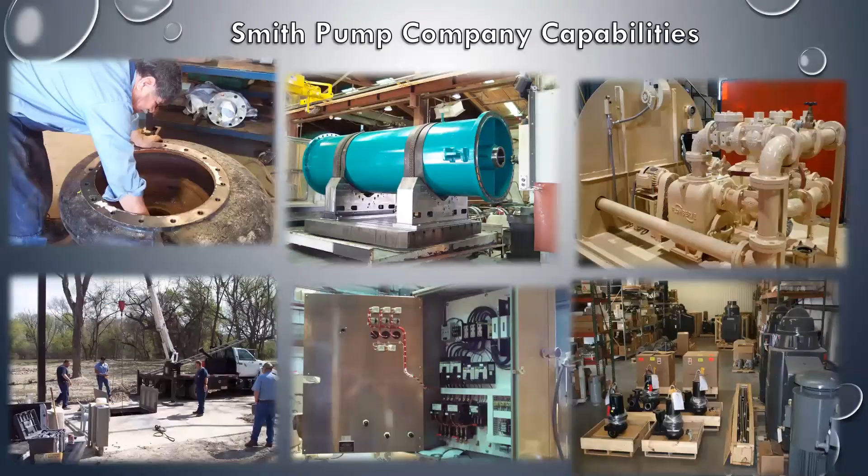In these various pictures, you can see a little bit of what we do. Pump repairs and reconditioning services is a major part of what we do, and all locations have shop services for all types of pumps. We have applications and service engineering departments dedicated to assisting engineers and end users, as well as on-site technical services for pump removal and installations, including on-site diagnosis and condition assessment. You can see here an image in the bottom middle - we have a UL-listed control panel construction shop. In the bottom right, we have warehousing for pumps and parts in all locations.

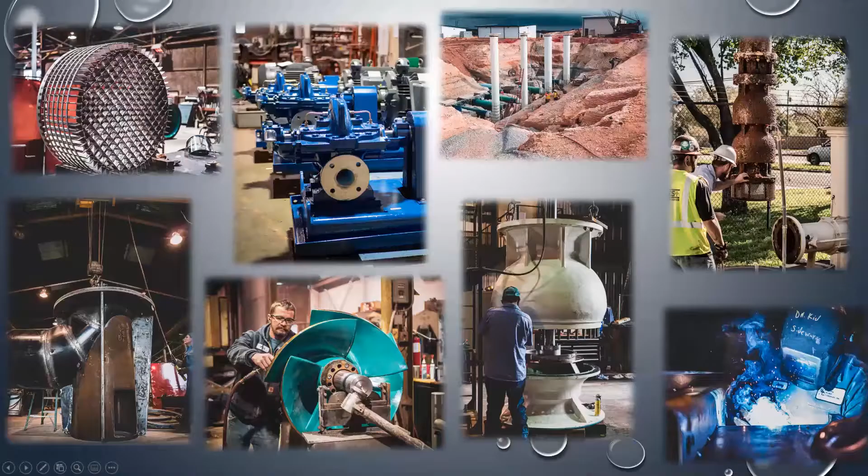The Waco facility is our primary manufacturing location, and we are capable of fabricating to meet design specifications using state-of-the-art tooling. We can repair and recondition pumps to meet or exceed OEM requirements. We also have a field service team available for site visits to pull, install, and inspect pumps and motors. Fort Worth has motor repair and rewind capabilities for vertical, horizontal, and submersible motors. Smith Pump Company is an ISO 9001 certified company.

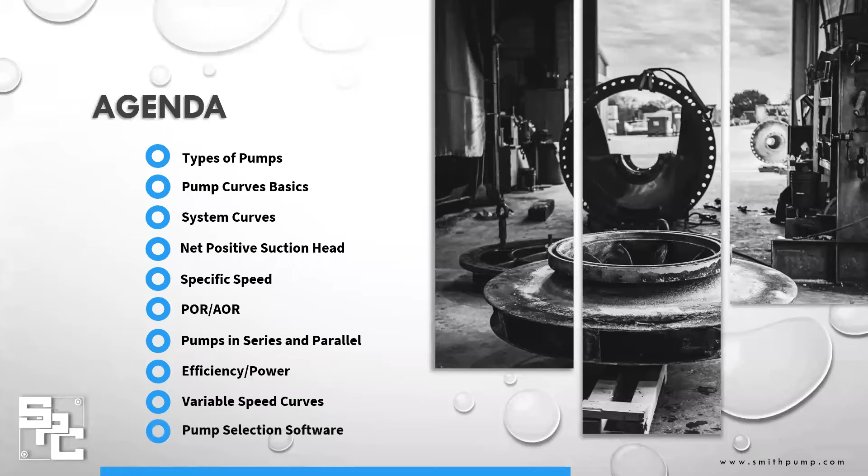To talk about the agenda - the items we're going to be covering - we're going to start off by talking about types of pumps, get into pump curve basics, system curves, net positive suction head, specific speed, preferred operating range and allowable operating range, pumps in series and parallel, efficiency and power, and variable speed curves. Finally, we're going to do a little bit of pump selection and some pump selection software.

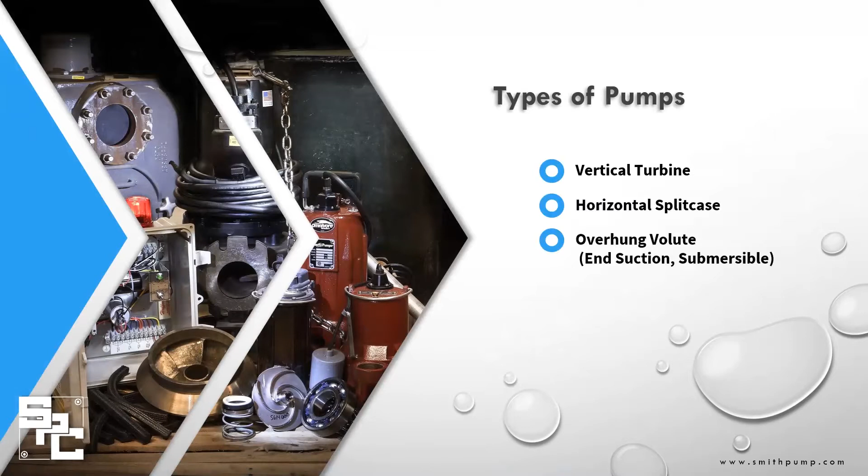Let's start off with some of the common types of pumps. We're going to talk about vertical turbines, horizontal split case, and overhung volute, which most commonly you see named end suction or submersible end suction pump.

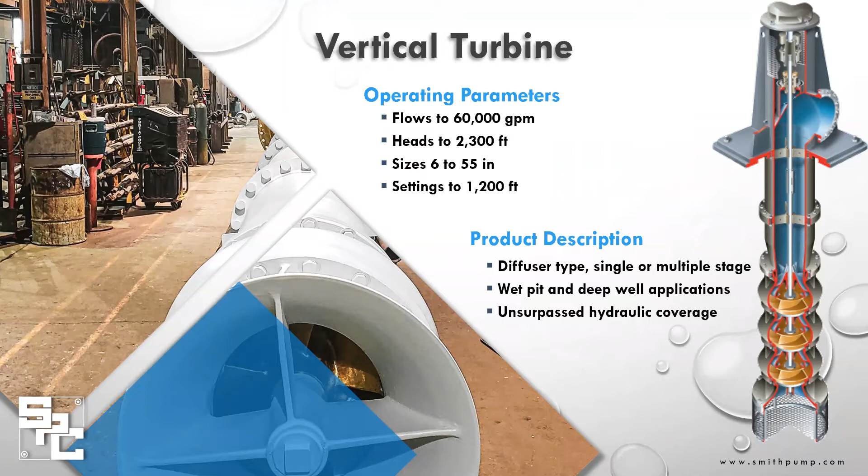Vertical turbines, as depicted in the images here on the right, you can see a cutaway image. Some of the operating parameters for these vertical turbine pumps is flows up to 60,000 gallons per minute, heads to 2,300 feet, wide range of sizes, 6-inch up to 55-inch, and can be set as deep as 1,200 feet. These are diffuser type design with single or multi-stages, placed in wet pits or deep well applications with unsurpassed hydraulic coverage.

So on the small size, you can actually achieve heads up to 800 feet. The design on these is a between-bearing design, so you have an impeller suspended between 2 bearings on either side of the pump, and it's actually split with a bonnet that comes off the top, single stage. There are some multi-stage smaller options out there, but for the most part, single stage is the main split case pump option with an opposing suction and discharge.

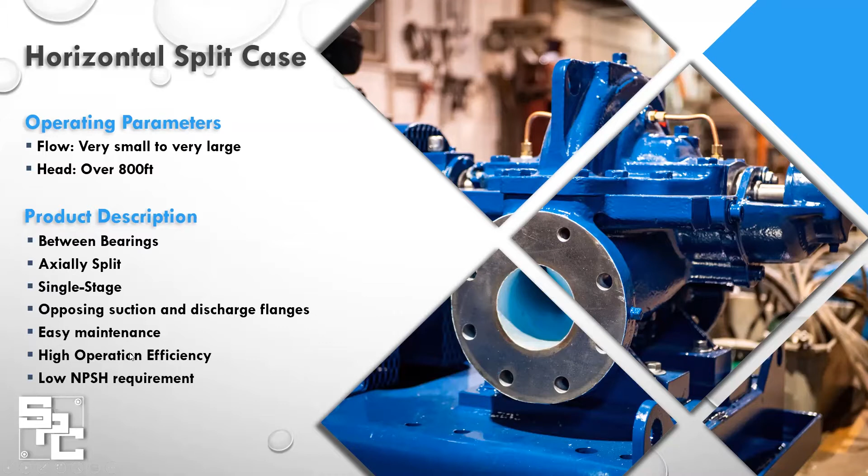These operate at high efficiencies and have relatively low NPSH requirements. Here's another image of a cutaway on a pump where you can see that impeller in there. This particular pump has packing on either side, with your bearings on either side as well within the bearing housing.

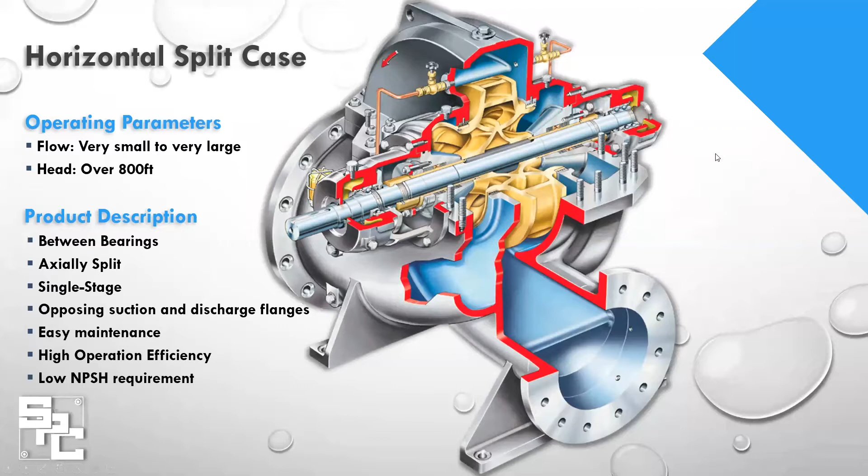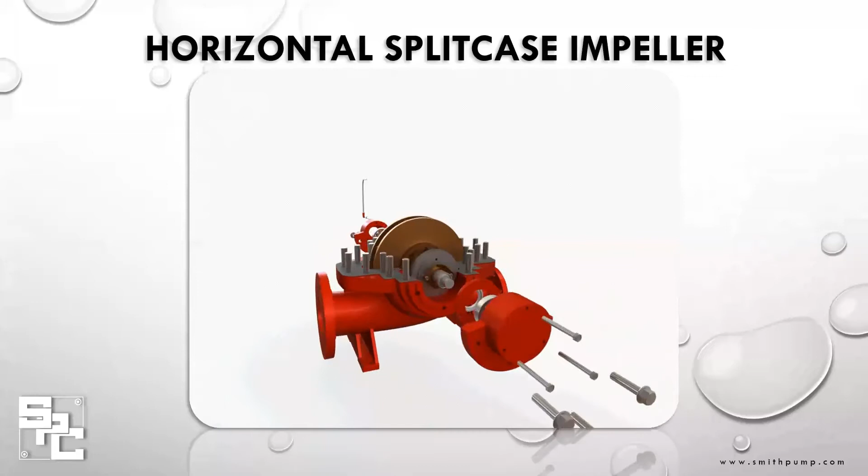Here's a little video that displays it a little clearer. That is the impeller that just got installed in the pump. You can tell that the bonnet is removed and components are being installed from either side. Here goes the bearings, the bearing housing.

And finally the bonnet. This allows for ease of access to the pump for maintenance in the field. If you were to find that you had an issue with the rotating assembly or impeller, that can be removed and leave the pump in place in the field to not disturb any piping.

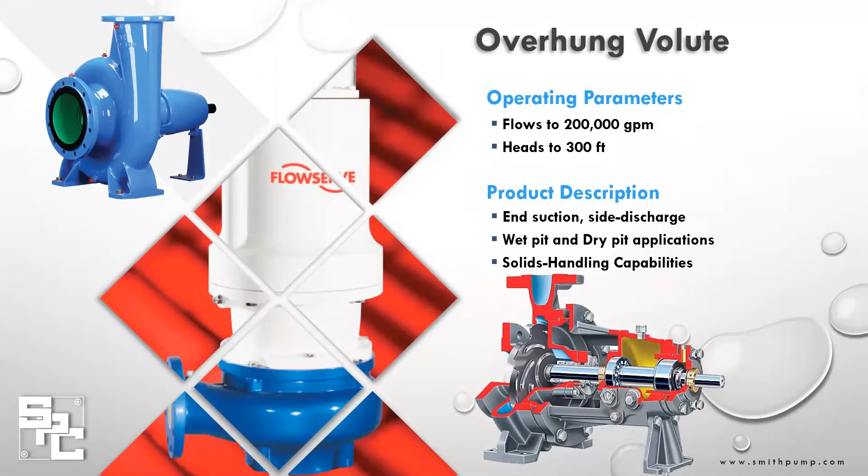And finally, we have overhung volute, and here's some various images of different types. We have an end suction, more standard type build, and we have a submersible end suction. These can get flows up to 200,000 gallons per minute and heads up to 300 feet, and they can be designed for wet pit or dry pit applications with also a solids handling capability.

As we look at this cutaway here, you can see that the reason it's called an overhung volute is the volute is overhung from the bearings. We have the bearings over here on the right side with your impeller inside the volute, overhung.

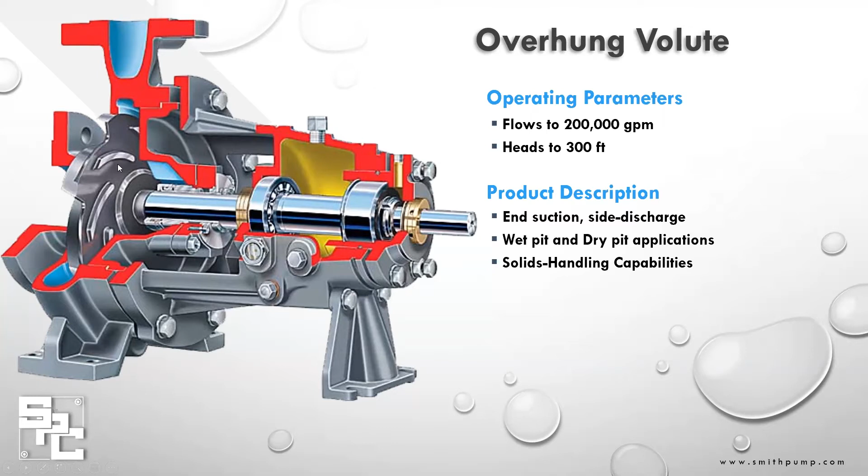Let's talk a little bit about the basics of a pump curve. Understanding how to read a pump curve is pretty critical in selecting the right pump. A performance pump curve indicates how a pump will perform in regards to pressure head and flow. So here we have a basic pump curve. The head is displayed in feet on the y-axis, and the flow is displayed in gallons per minute on the x-axis.

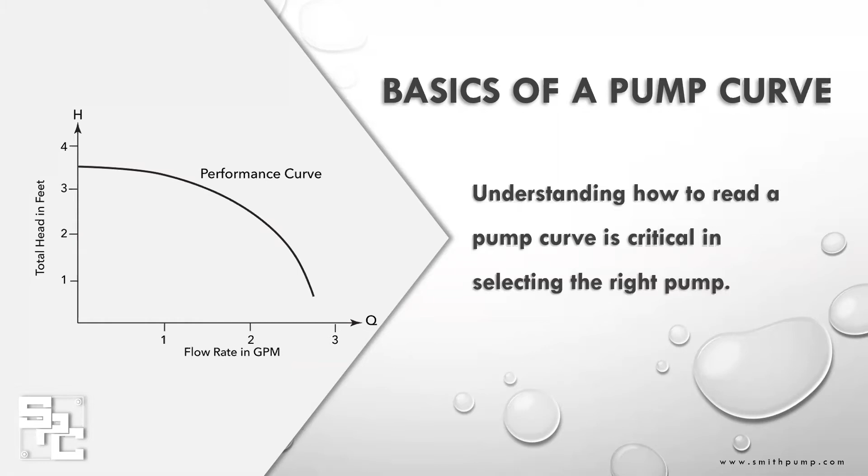This is a family of curves of various different types of pumps, grinders, choppers, vortex, monovane, etc. If you look at the grinder pump, we're dealing with pretty small flows, up to maybe 100, maybe even 200 in some cases, gallons per minute, with heads nearing 175. But if you travel on over to the right side of the curve, we have vertical turbines with some of the greatest flows. In this particular image, we're looking at a single stage vertical turbine, where the advantage of the vertical turbines is you can add stage upon stage to achieve even higher heads.

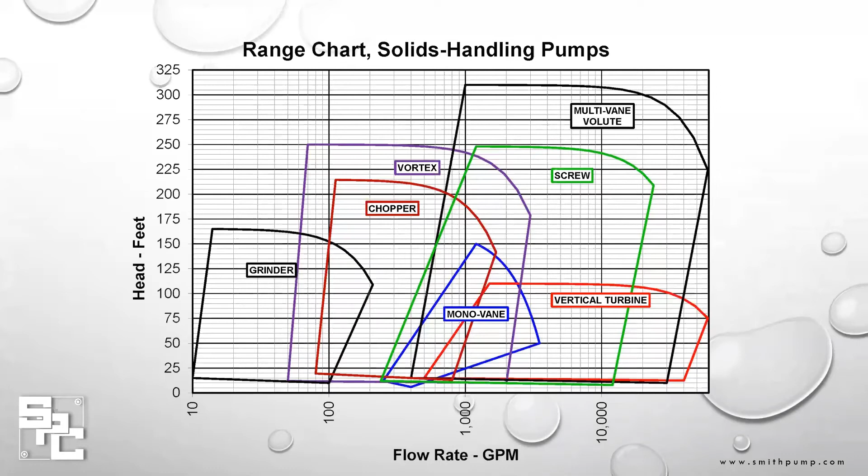Let's talk about system curves and why they're important. System curves are made up of two fundamental components. We have your static head. In a static head application, where you're simply just pushing water over a wall or directly up, you would have a relatively flat curve. So this is your vertical lift, the height the water must travel as it moves through the discharge pipe.

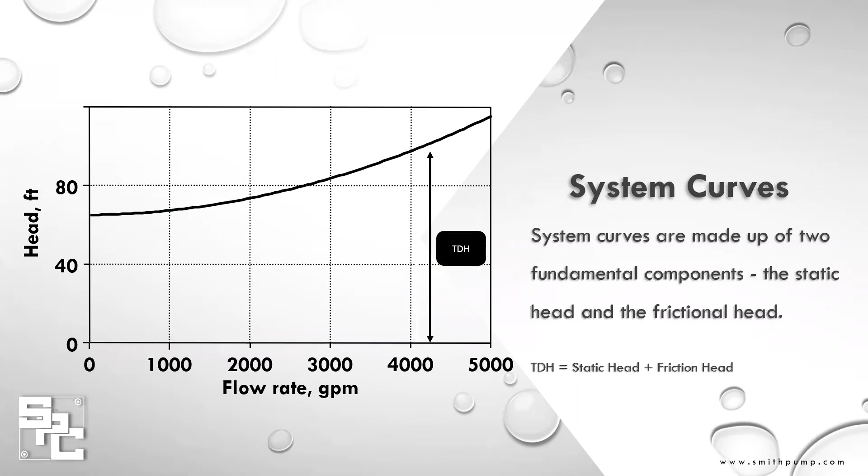So when we combine these two, we come up with what we call the total dynamic head of a system, a combination of static and frictional head. So how do we determine the operating point of a pump? We're going to take our pump curve and our system curve and draw them on the same chart, and the point at which these two intersect, we call the operating point.

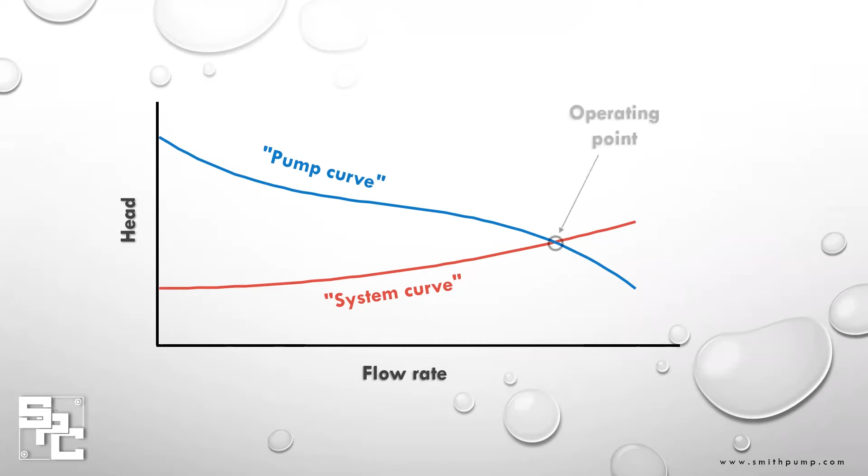Another important item to consider when selecting pumps is net positive suction head. For pumps, the manufacturer determines the net positive suction head required. They come up with this number through extensive testing under controlled conditions, and it's the minimum suction pressure that must be exceeded for the pump to operate correctly and minimize cavitation.

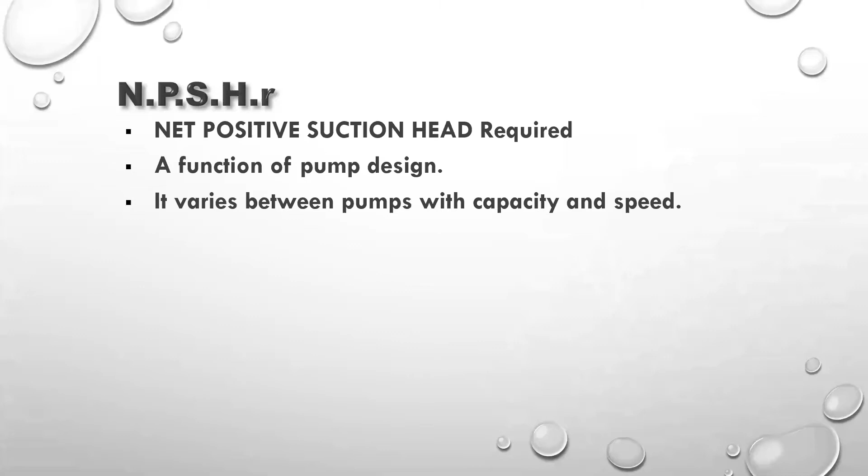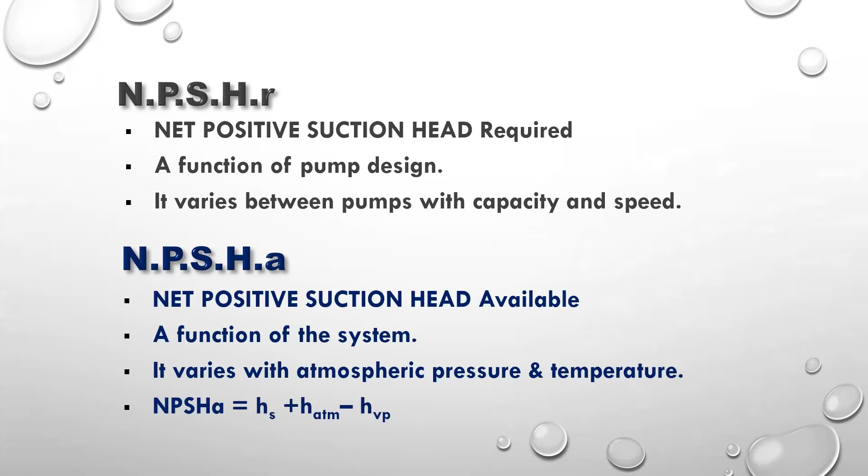We also have your net positive suction head available, which is calculated from the suction side of the system configuration. This is essentially the pressure less the vapor pressure of the pump fluid at that point. So your NPSH-A must exceed the NPSH-R rating for the chosen operation to minimize cavitation in the operation.

Some of you may have heard of NPSH3, which is the net positive suction head required, resulting in a 3% loss of total head at the first stage impeller. This value is determined through testing by the pump manufacturer, and margin above this is necessary for the pump to develop its full published performance curve. Most pumps can operate satisfactorily with minimal margin above the NPSH3 value when operating near the best efficiency point rate of flow. A greater margin may be required when operating through a wider operating region.

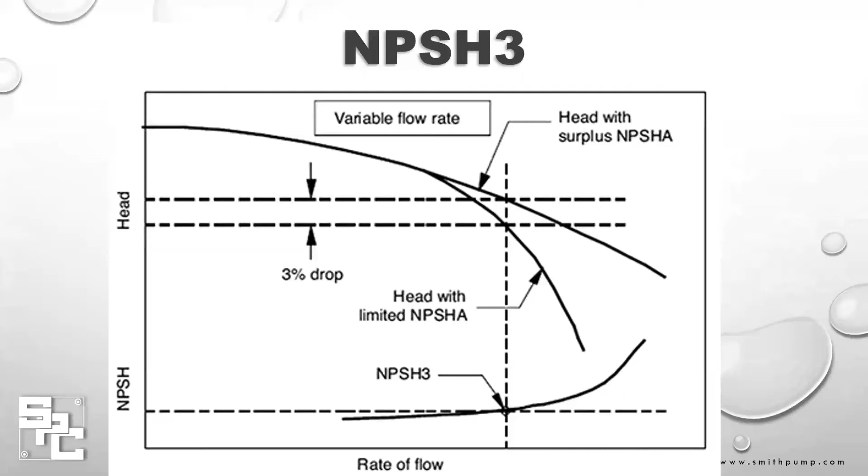It's interesting to note that cavitation is highest at the NPSH3. So when NPSH-A equals NPSH3, let's look back here at this curve, we'll see a 3% head drop when it equals. To try to avoid or minimize cavitation, we want your NPSH-A, the available NPSH, to be greater than the required NPSH.

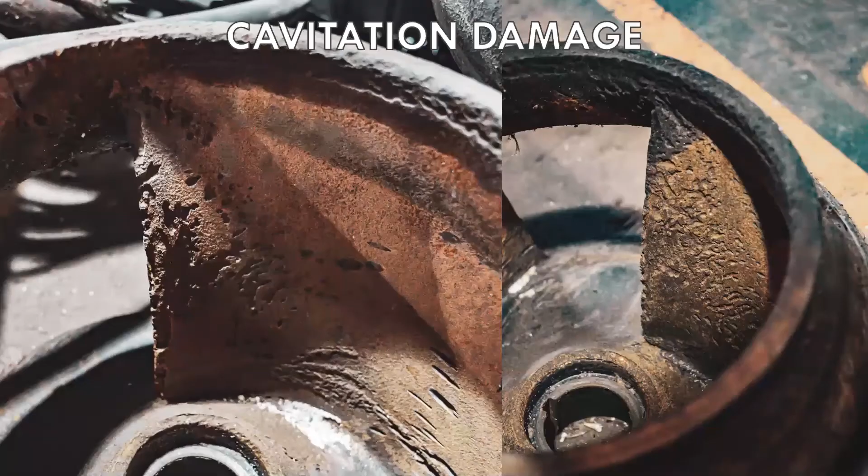We'll start by looking at just an image of cavitation damage on a pump. What you see here on the suction side of this particular impeller, we have some dimples that were created from vapor bubbles imploding. Over time, this is going to gradually eat away at your impeller and reduce the overall performance.

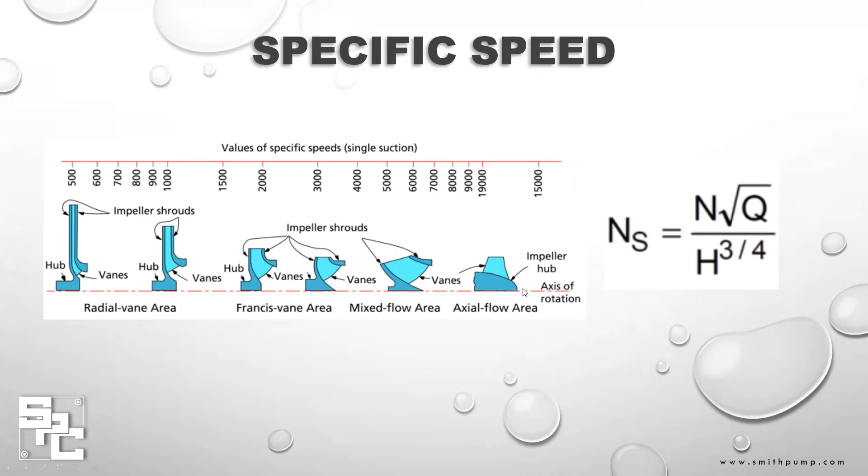So that's over here on this side, a lot of head, low flows. And as you get to the right, you head all the way towards your axial flow, which is more close to like a boat propeller. We have a lot of flow with less head.

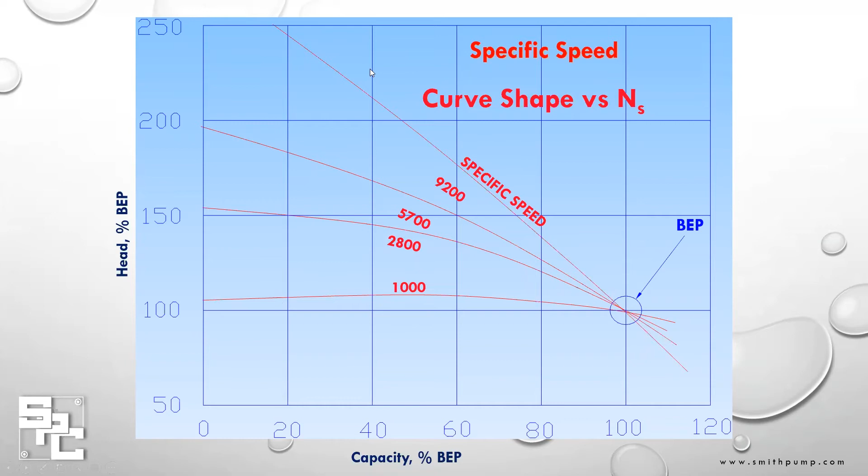Preferred and allowable operating range. You may have heard of this before when trying to select a pump. The preferred operating range is the portion of the curve in which continuous operation conditions should be located if possible. Volute pumps and standard centrifugals are typically in that 70 to 120% range.

Whereas diffuser pumps, when you get to the high specific speeds, we're talking about 80 to 115%, but most standard is your 70 to 120. So defined by Hydraulic Institute, your preferred operating range varies depending on the type of impeller, but in most cases extends from 70 to 120%.

Then we also have your allowable operating range, which is determined by the pump manufacturer through engineering analysis, testing, and experience. This is the range of operating conditions that the manufacturer considers to be acceptable. While a pump may be operated intermittently for short periods outside of the AOR, for the most part, operation should be maintained within the AOR.

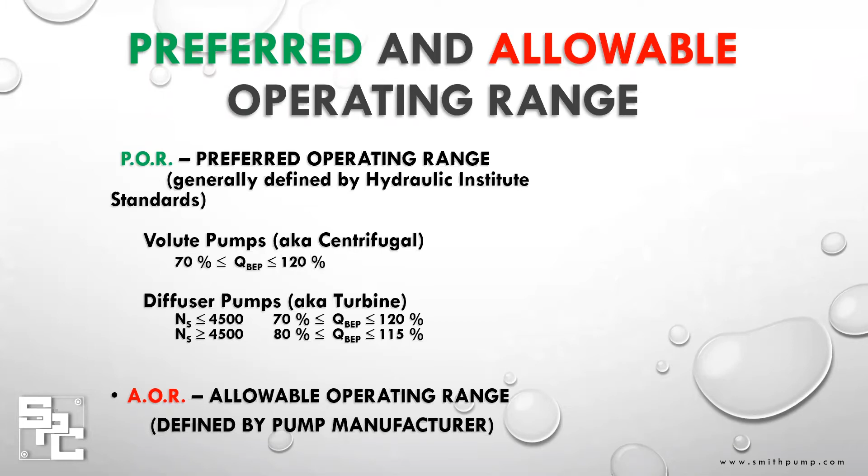As we stated before, as you get further away from BEP, the margins required for NPSH can be greater. In this particular scenario, this is from a real job. We had a customer, an end user, with 8 pumps in operation. What they were experiencing was that whenever they were operating one pump, they had cavitation that they had to live with for quite a while. So when they came back to replace these pumps or try to improve the situation, their request was to find a pump that didn't cavitate. And that was their requirement, which is really not the best way to select a pump.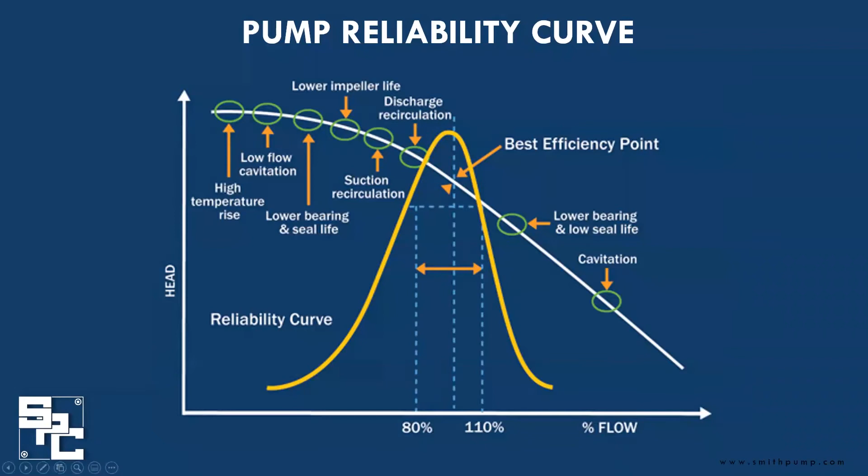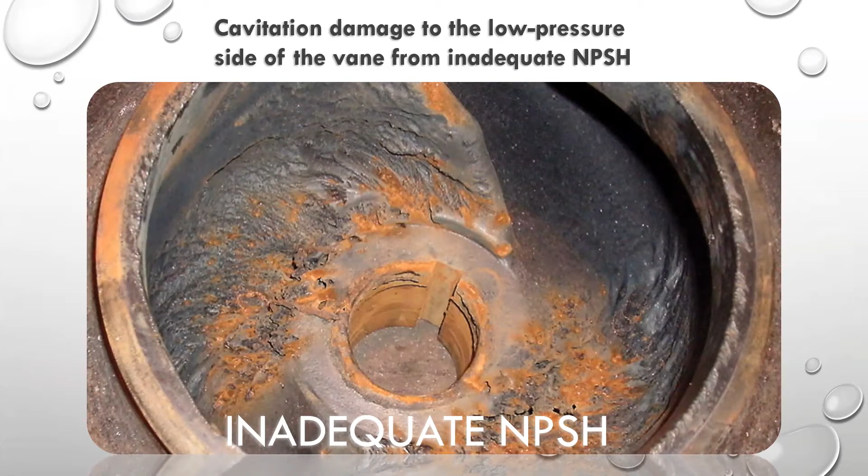Here we have cavitation damage due to low pressure side of the vane from inadequate NPSH. So this is low NPSH cavitation. What is happening here is the vapor bubbles are imploding as the pressure increases through the impeller, slowly eating away at it. Eventually your flow characteristics are going to change greatly, the impeller is going to fall apart, and you're going to notice a drop off in performance. Most people describe the sound of cavitation as a marbly or gravelly sound within the pump, like it's pumping rocks.

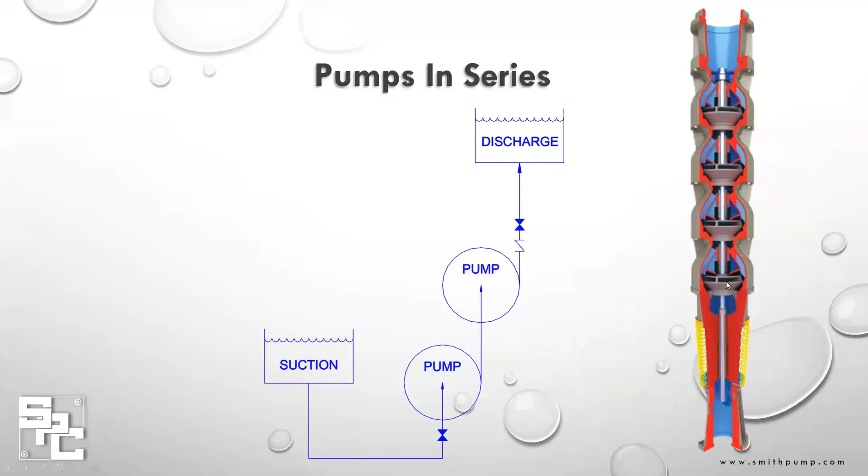Let's talk about pumps in series. I have a real basic depiction here: two pumps, one pumping into the other. But more commonly, you will understand pumps in series as vertical turbines, essentially, where you have one bowl pumping into another and so on. We can look at a very standard or basic curve of three pumps here in line, and what you're seeing is increased head rates. As you add another bowl, you're increasing that head and so on.

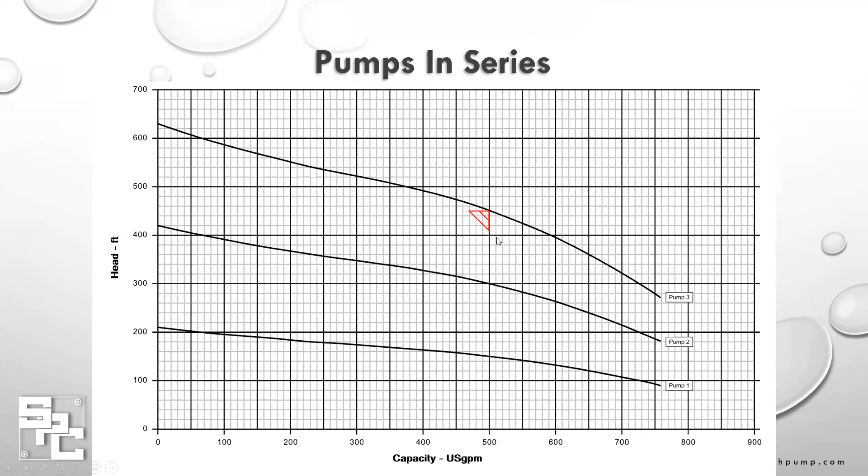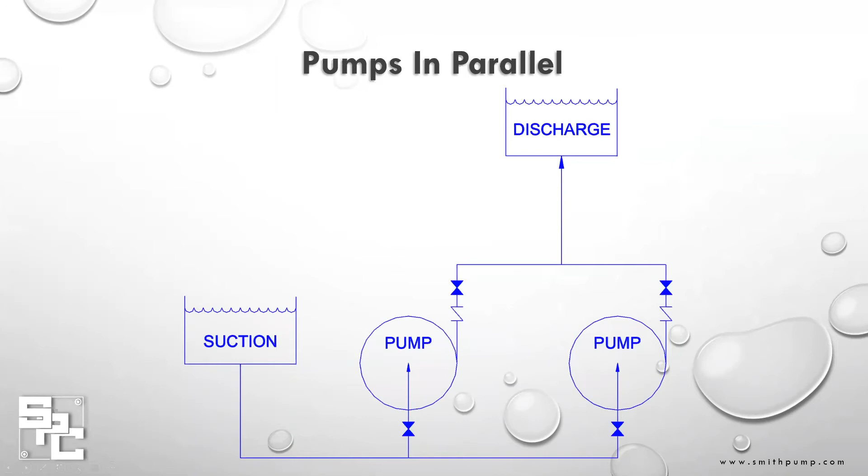We also have applications for pumps in parallel, and essentially the purpose of this is to increase your flow rate. You have two pumps in line, and you can obviously add more and more. We can look here at the pump curve and what happens as you add a pump into a parallel operating system. Here's one pump on a fairly standard system curve, with a little bit of static head and friction head.

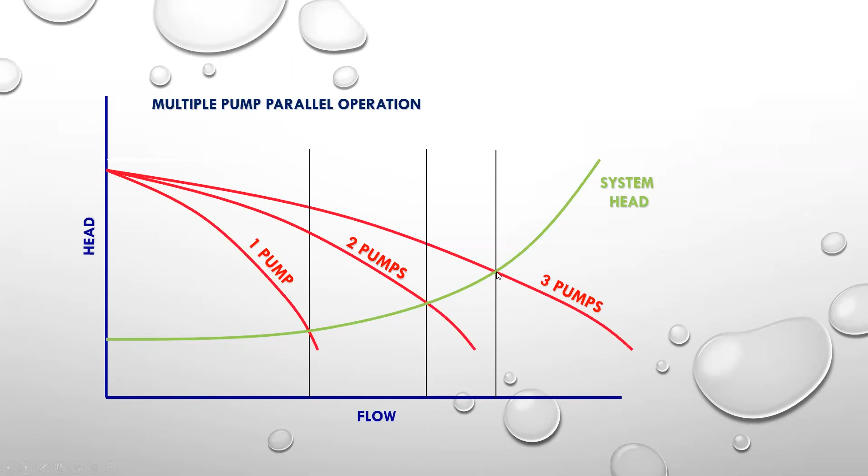As we add a pump, we have an increased flow. You can see that you're getting an increased flow, but it's not doubled. As we add a third, we're getting more, but just a little bit less. If we look at a high friction system, we can see probably a bad application for parallel pump operation with multiple pumps. As we increase the pump operation, we get a flow increase, obviously, but our head is increasing greatly, so it's not too much of an increase. We go to three pumps and it's a very insignificant increase in flow. Probably now that we're operating three pumps, we're actually at a bad location on the curve for all three pumps. Not a good scenario there for three pump parallel operation.

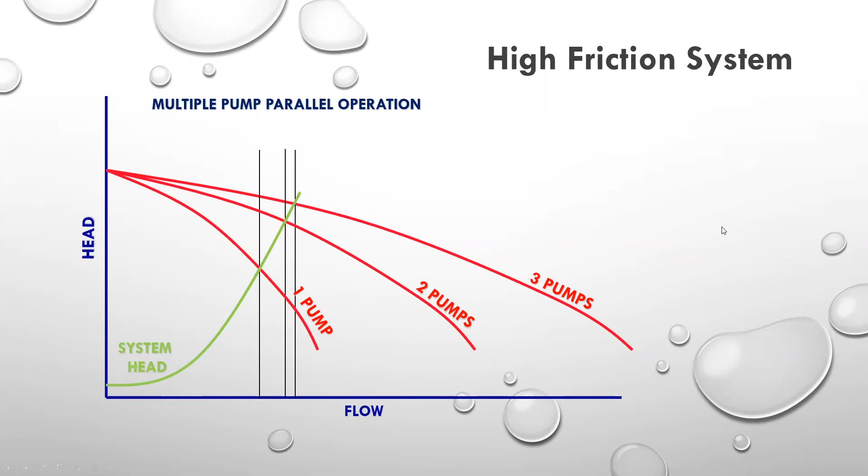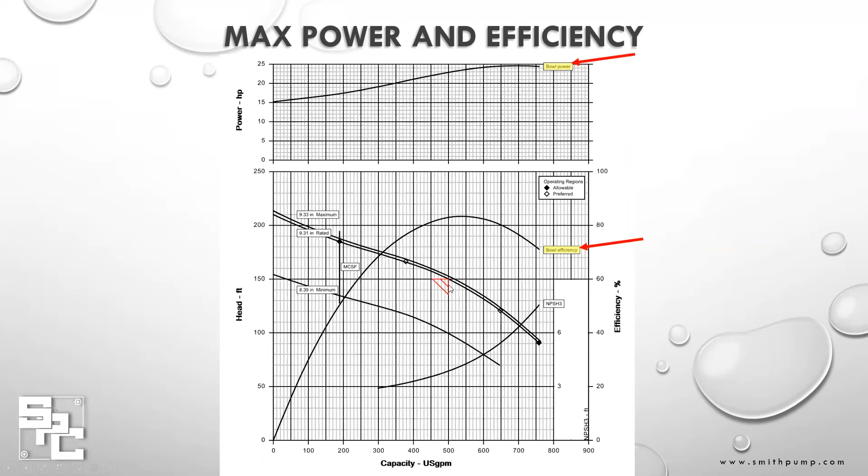That's at the rated point, so we have 23.6 horsepower. Max horsepower, that's back at the peak of this curve, 24.7. So probably in this scenario you wouldn't want to select a 25 horsepower pump, because there's a very high possibility that if operating any further to the right, we could potentially get into the service factor of that pump. So it'd probably be recommended to go up a horsepower or reduce the trim of the pump with some safety factor to where you'd be comfortable operating below 25 horsepower.

Variable speed curves. This is a way to operate a pump at multiple speeds by turning down the speed of the pump. So how do we come up with these variable speed curves?

We use the affinity laws for centrifugal pumps, used to predict performance for changes in impeller diameter and impeller speed. The affinity law states that for the same impeller diameter, if the pump speed is changed, flow rate is directly proportional to the speed, whereas the head is directly proportional to the square of the speed, and the power is proportional to the cube of the speed. Those are the formulas here on the right, the affinity laws.

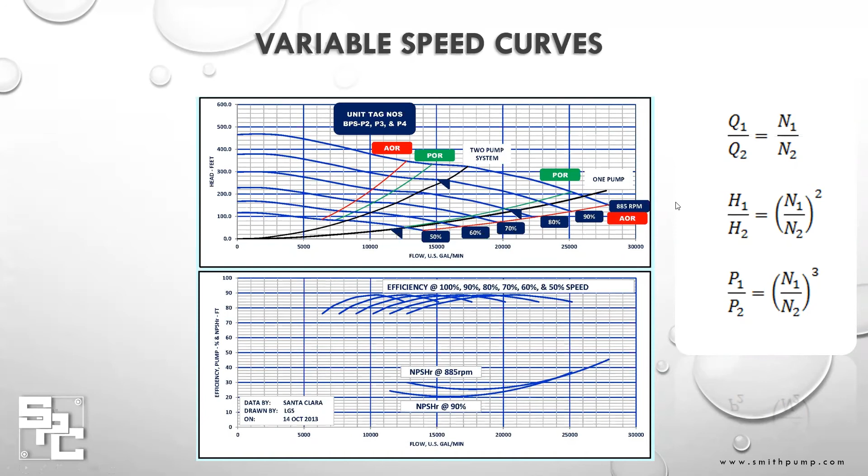We can look closer at the curve and just kind of see what we're looking at here. We have a one pump system curve and a two pump system curve in black with the design points on them. As you can see here, max speed operates at 885 RPM, turned all the way down to 50%.

This particular design looks like a pretty good selection for these two system curves, because we're following the POR and AOR curves fairly well, staying within AOR with the one pump and POR within two pump all the way down to this 50% speed. So not a bad selection there.

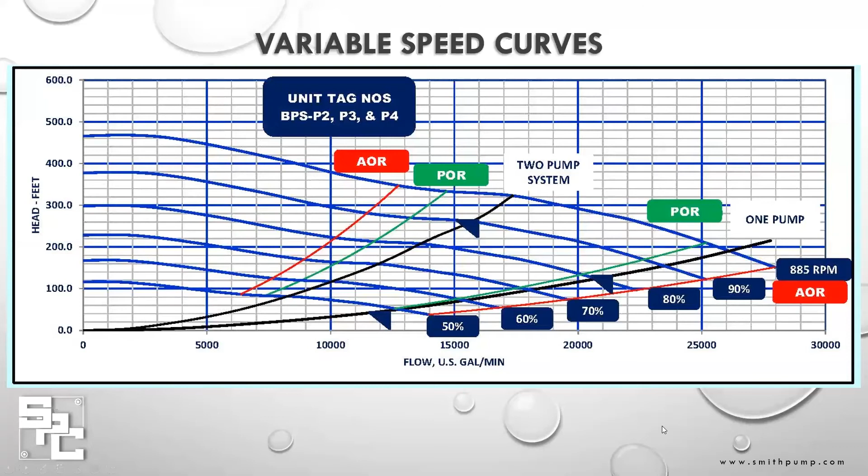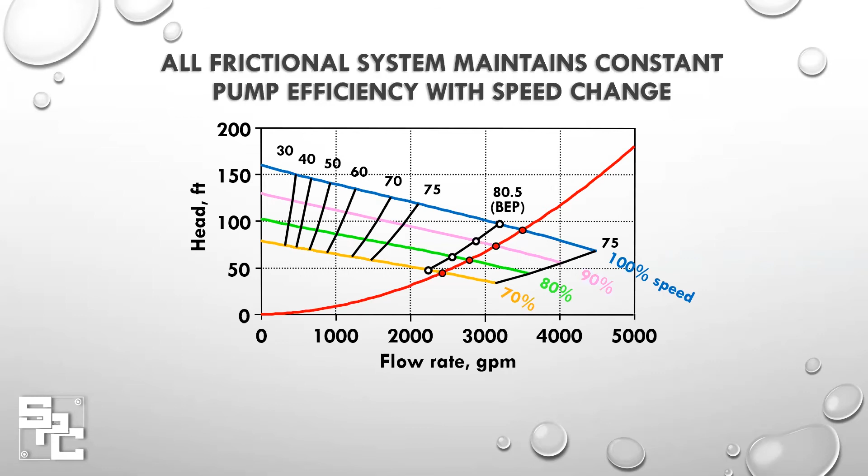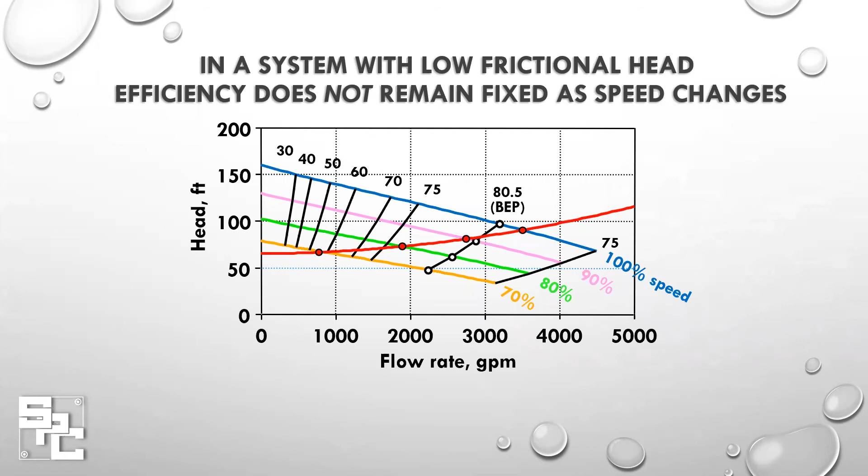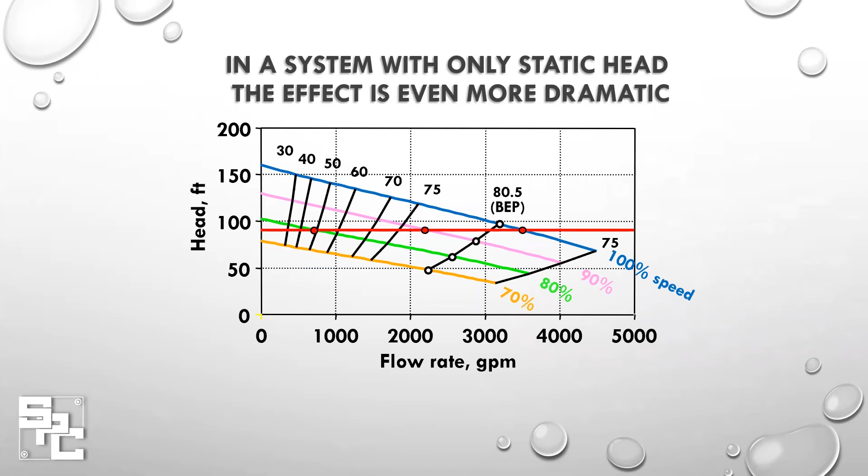More dramatically, if we look at a pure static head curve, probably not the best selection for variable speed operation. This is probably more a way to describe a static head operation, would probably be like a floodwater pump pumping right over a wall into a retention basin. Not the best for variable speed operation.

So here we have some of the more basic pump selection software out there.

A lot of you may be familiar with PUMP-FLO, which is available through a lot of pump manufacturers. Pretty straightforward, easy to use. You can get PUMP-FLO from most pump manufacturers off pump-flo.com or .net, and then through some of their sites.

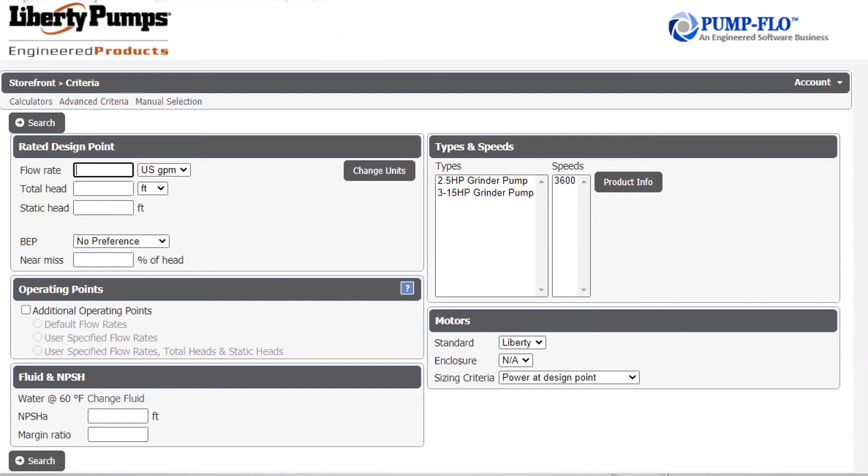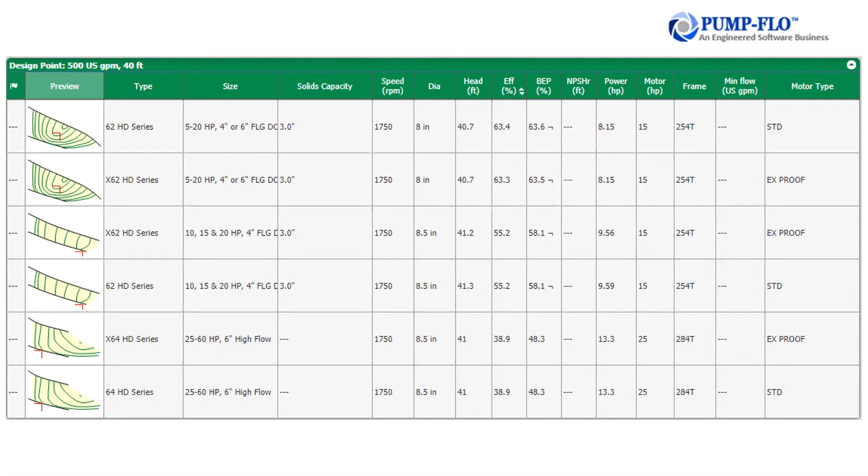Once you find a selection that you like, this is kind of what it looks like. You have efficiency curves that indicate the efficiency in those regions, displayed here in green. You have power curve lines, and the allowable efficiency is highlighted in the light yellow area.

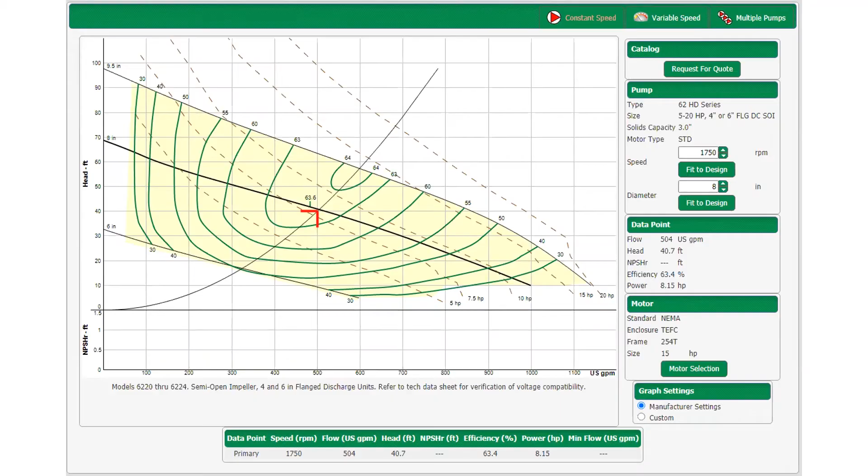So other than that, what else is out there? Well, Flowserve Affinity has a customer portal available to everyone. It's free, sign up. Affinity is their latest state-of-the-art pump selection program from Flowserve, and it provides support for 80 or more products that they offer. It's web-based, so really available from anywhere, and it offers real-time access to their latest and most accurate data. This is the same tool they use, the same tool we use.

So I'm going to go ahead and head on over to the website. The link here seems a bit long, but basically to get to this, you really only have to search for Flowserve Affinity Pump Selection. It should be one of the top links, and it'll bring you to this page, where you can log in right here.

Here I am logged in. This is the starting page that you'll find. To create a new quote or selection, you start here with new quote. You can enter any of your information as you like, and continue to create a quote. This is where you would name your quote, so we'll just name this test.

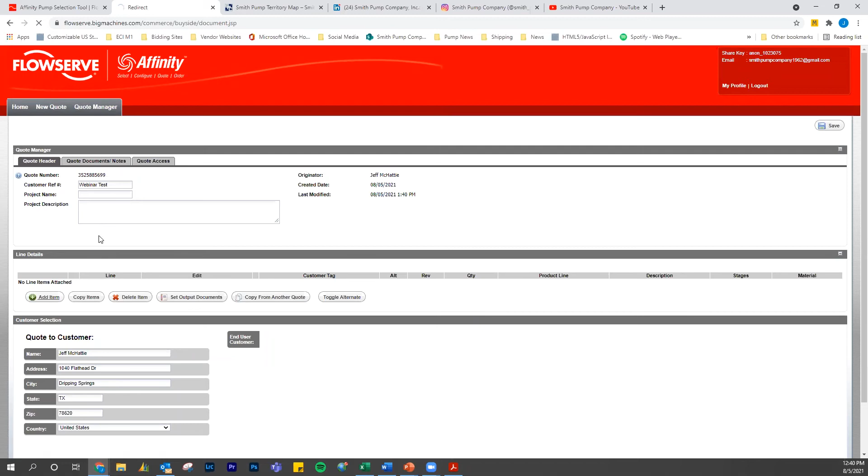Add item. That's going to bring you to this page, where you have the option of selecting a pump by list or by duty condition. If you knew the pump model and size you're looking for, and wanted to see performance of them, you'd just go to list. But since we have duty points, we're going to start off searching by duty conditions.

Required information on Affinity is highlighted by the red asterisk, so we see here that we require a flow and a head. This is the bare minimum you need to proceed. But of course, if you get into more detail with some of the options below, you can select your liquid type, and if you had an NPSH, you can enter that, etc. But we're going to just go ahead and start with the bare minimum, 1,000 gallons per minute, 150 feet head, and proceed to the next page.

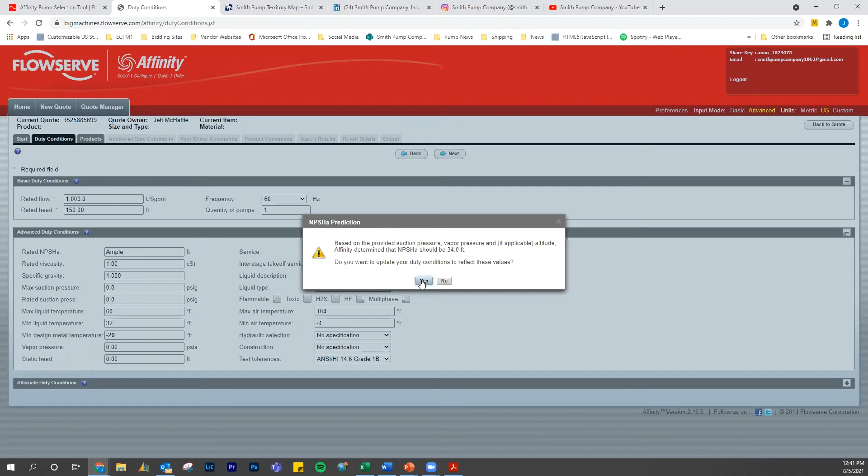What it's going to do is pop this window up. It's trying to predict your NPSH based on just standard information, so it's going to say 34 feet. If that's acceptable, you can hit yes to proceed. Now, if you get to that point and have questions, you can always contact us at Smith Pump. We have a whole team of application engineers happy to make these selections for you. But we're going to go ahead and proceed with 34 feet of NPSH and proceed to the next page.

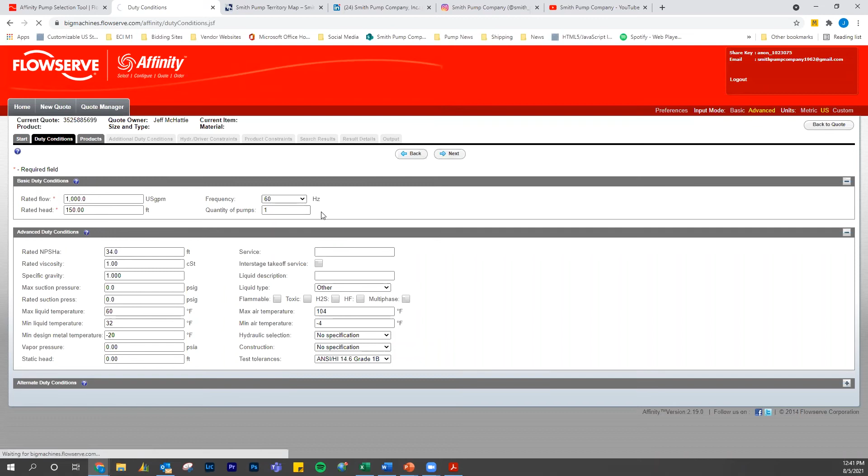Which will bring us to the products. We are looking for a vertical turbine pump, and Flowserve vertical turbines can be either wet pit design or canned.

If you look at this, it looks like there's quite a bit here. You might not know all the pump models, but there are ways to filter this down to get this a little easier to work through.

But I do know that on Flowserve units, their vertical turbines are VTP model, and we're looking for a wet pit design, so that's what we're going to select. I'll click that box, add it to the right side. This would really allow you to add multiple pump models here to look at various possible selections. So if you wanted to look at a vertical turbine and a split case at the same time, you could do that. But here we're going to go for vertical turbine, and we're going to proceed to the next page.

If you really were looking for something quick, you could go right into the pump search right there. But we have more things to enter, so we'll go next and proceed to the vertical duty conditions.

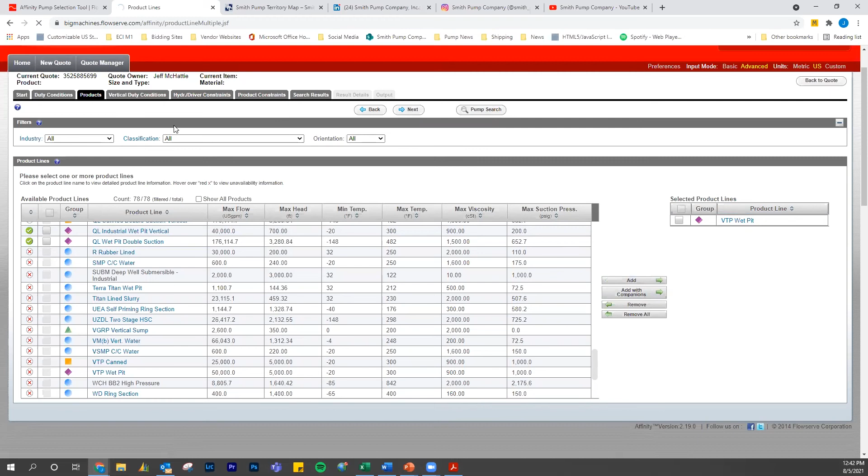So on a vertical turbine pump selection, we are asked some questions on where the rated head is determined. The default is at the discharge flange centerline. However, if you were to select that as an option, it's going to try to calculate additional head required at the low water level. So your curve is actually going to be trimmed upwards. It's going to look off. Your operating point is going to be hovering off below the curve.

So we know the low liquid level, and we're going to go ahead and utilize that. And we want a pump length strategy maximized for that sump depth. So that means we got to enter your sump depth, which we have is 20 feet, and a low liquid level. Well, we know it's 4 feet from the bottom, so that would be 16 feet from the mounting surface to the low liquid level.

And we'll proceed to the next page, which will be hydraulics and driver constraints. Like I said, there's more detail you can get into here, but what we're going to do, which may not be necessary, is try to filter this down a little bit to eliminate some of the selections that could come up.

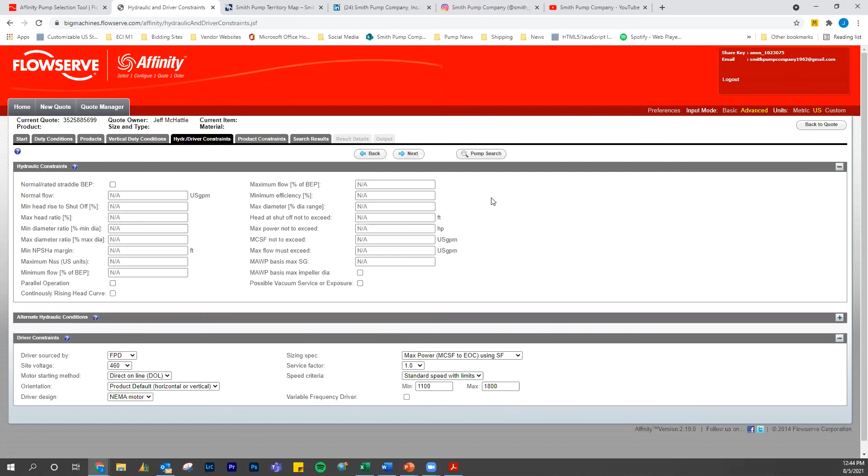So we're going to set a standard speed with limits, because we know we're looking for 1200 to 1800 RPM operation, and we can set the max to 1800 RPM. However, on the minimum, we know motors don't really operate truly at 1200. They're somewhere a little bit lower, so we'll set that to 1100. And we'll go ahead and proceed to the next page.

Here we have the product constraints, which you can really get into detail on what you want on a pump. But for selection purposes, you could start off with standard materials, unless you're really considering stainless impellers. In that case, you may want to select stainless. That way it can calculate the actual efficiency, because with stainless, we have typically about a 3% derating in efficiency if we're going that route.

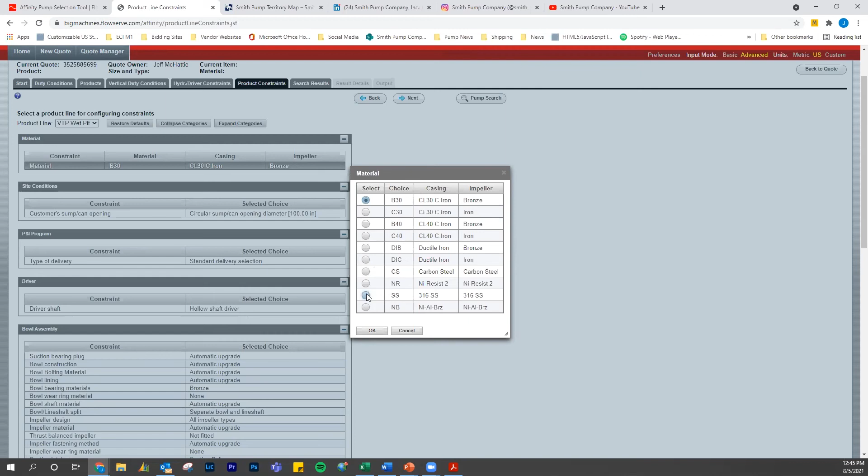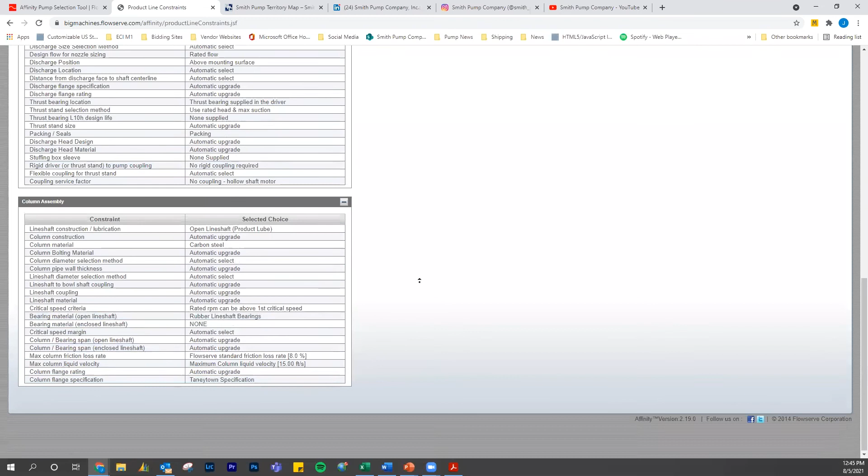For this application, we'll just stay with the standard. And if you ever get into something where you really want these selected, once again, contact us. We're well familiar with working through these. But for a real basic selection, standard materials, and proceed on.

So now that I've hit next, we've proceeded onto the search page, where it's going to search through their database for all selections and vertical turbines that meet that criteria. You got to give it a little sec, because it came up with 82 selections. We're looking currently at 10 on the page, but if you wanted, you could expand this to 25, 50, or even show all of them.

Affinity allows you to sort by any of these columns, very similar to some of the other pump selection out there. But the great thing here is I can look at all of these, the ones I want. So what do I know about this particular selection that I'm trying to do is I'm operating on a variable speed drive. So when I know that when I slow down a pump on the system curve, the operating point is going to gradually move to your left. So I'm going to try to look for something that's operating to the right of BEP.

So I'm going to sort by BEP, and what it's going to do is bring up your high percentage of BEP, which is to the right. Give that a moment to pull up.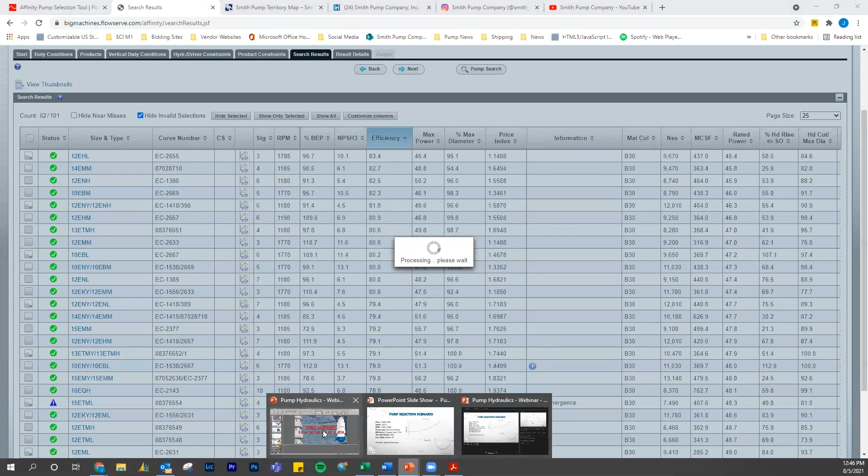The other factor we're going to take into consideration is efficiency. Going back to the requirements I had set aside, we were trying to get something that's 75% efficient, so we're going to look for that as well in this selection.

Let's head on back here. Taking a little bit longer than normal, usually it's a bit quicker than this. So let's sort by BEP.

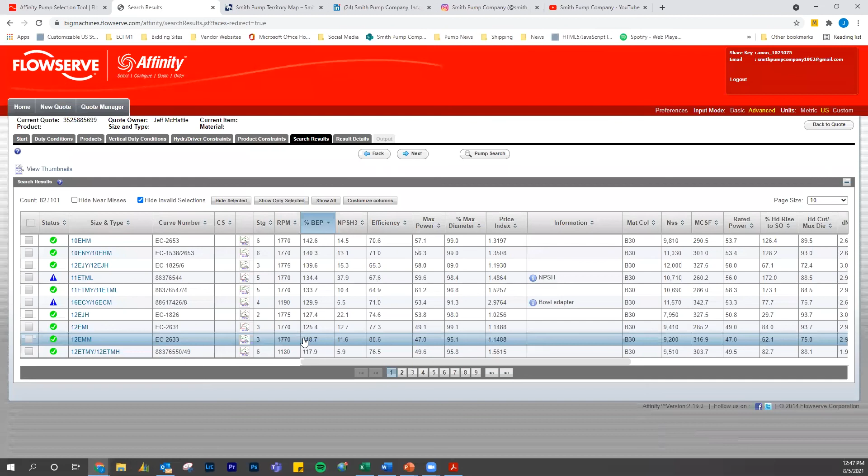This is probably not the best approach because I can see we're already eliminating some of the selections we want to look at, since I want to start within that POR range, 120 max. Let's see if I can get this to work one more time. If not, I'll skip to the next step.

Okay, good. So I'm going to start off at 120% of BEP and work our way down, just selecting options. Another thing you can do is hide these, but we're going to skip that step because I don't want it to reload.

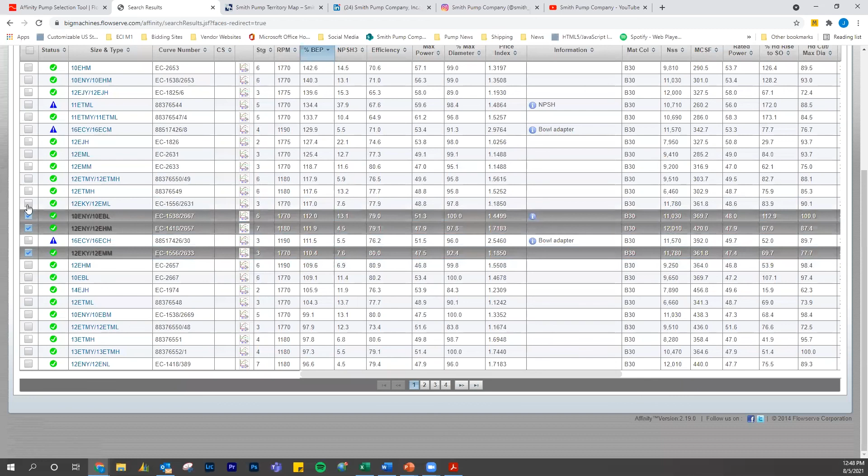So I'm going to click all of these options till I get somewhere close to BEP, so I've got all the right side ones I'd like to look at. A great feature here is I can view their thumbnails and look at them all side by side to find what I want.

We're looking for something in the 1200 to 1800 RPM range. From a cost perspective, higher speeds are going to be less expensive because you'll have fewer stages. As you can see here, you've got your 1200 RPM selections with 6 and even 7 stages.

But really, these are all not very bad, but here's the selection I'm going to go with right here. We have a 3-stage, 12-inch pump, 1800 RPM at 80.6% efficient - the highest efficiency of all these, and less than 50 horsepower.

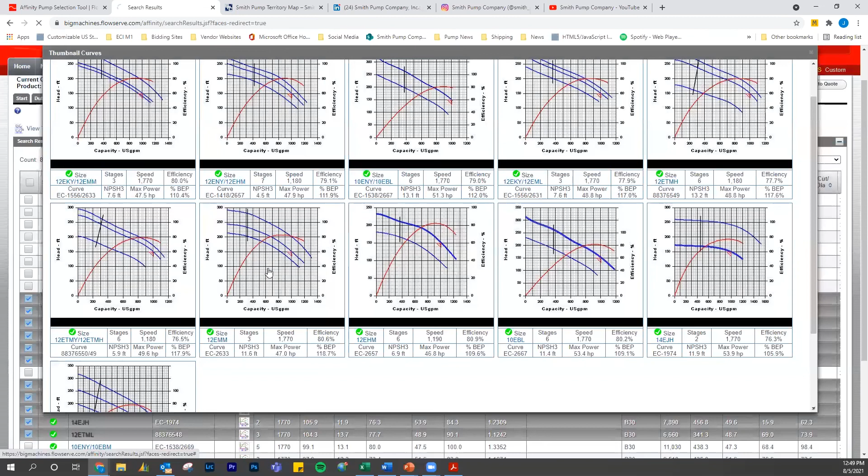We're operating right of BEP. So you can go ahead and click that selection and it's going to select it for you, and bring you to your results page with some information on that selection - horsepower, efficiency, etc.

We can also obtain this from data sheets later. So now that we have that selection, what we're going to do is proceed to the next page.

One of the great features with Affinity is the ability to export your data. This information would allow you to get data sheets, standard curves, GA drawings, construction data, etc. But we're going to export this data so we can get the actual numbers and plot this with our system curve. I've already done this step.

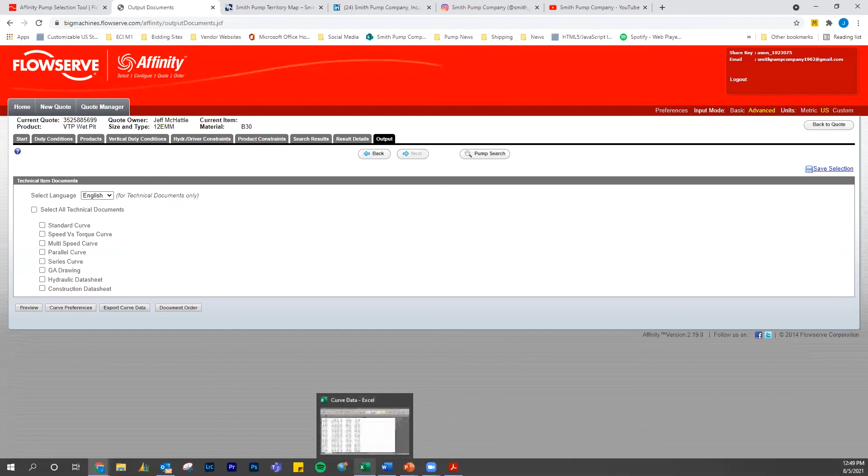The data it's going to pull out for you is all of this. I've done a few calculations for different speeds here, but you're going to get your capacity at rated conditions, your heads at minimum trim and max trim, efficiencies and power, and even your NPSH.

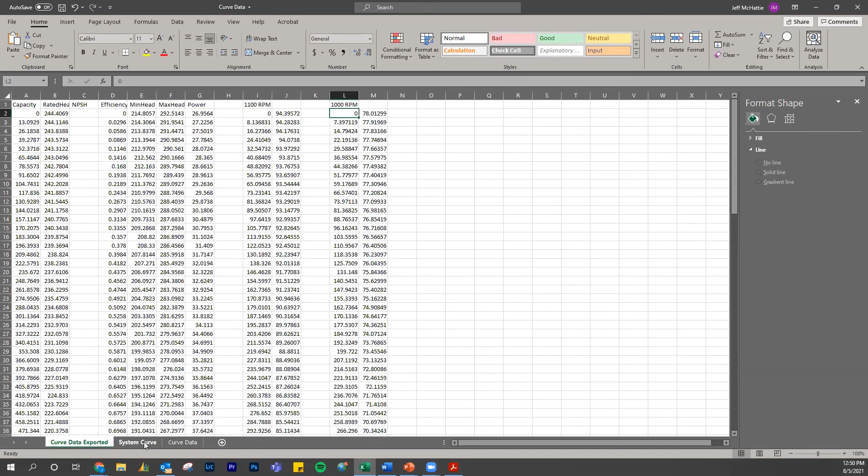So what I've done is taken this data, done some affinity law calculations for speed, taken my system curve and entered it in here, and plotted it all together to see how it looks. I know that this particular pump operates at a max speed of 1770 RPM.

And I've selected 2 different speeds to really show our limits of the system curve. So at 1100 RPM, we're probably at a pretty good spot here. It'd be important to look at your actual POR to see if we're in a good spot, but you can see that we have moved on the curve.

So we are moving left of BEP. But if we go down any more, we're probably getting to a location that's not good for operation on this pump. So that would be the limiting lower speed for this particular pump.

Of course, if we had lower static head, it might be even better overall. So going back to one of the earlier slides, high friction systems are usually better than a lot of static head based system curves.

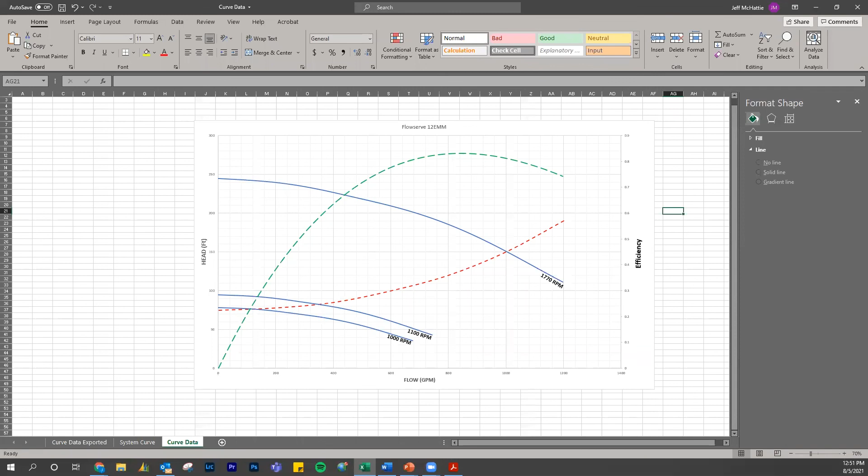So let's return here to our findings to get a little zoomed in on this curve. You can see here that I have gone ahead and plotted this within Excel. It's great to get some of that information and plot against your system curves to really view these.

And this can get a lot more detailed when you're looking at multi-speed operation and multiple system curves, but it's a great feature. And the good thing too is once you've made a selection in the software, you can bring that on over to us and we can pull up that exact model.

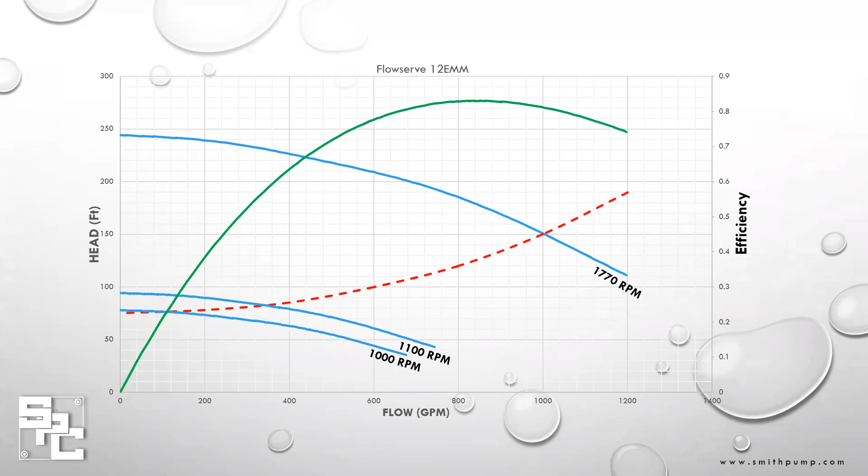Of course, our end has pricing built into it, so we could even compare pricing for different pumps, etc. And like I said, Affinity is available, it's free, and everyone can use that.